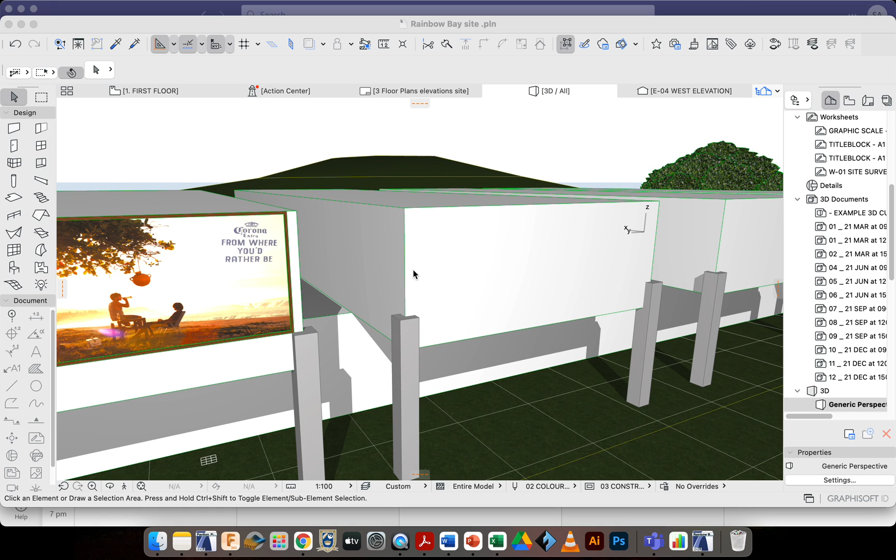In this tutorial, I'm going to take you through how you can put a picture onto a wall, and then how you can edit the image on that picture frame to be more in line with whatever theme you're trying to do.

This file here is of the surf club down at Coolangatta. We're going to show you how we're going to put a Quiksilver logo or something into a picture onto this wall here.

The first step is to go grab some images that you think might be suitable to put onto pictures for that particular theme or whatever theme you're working on. So what I did, I went to the internet and then I just made a folder, inside my building construction drafting folder.

I called it images for posters, and you can see I've added a couple of images from the net, sorts of things you might see on the walls of a surf lifesaving club down at Rainbow Bay. So that's step one, create those files into a folder and remember where that is.

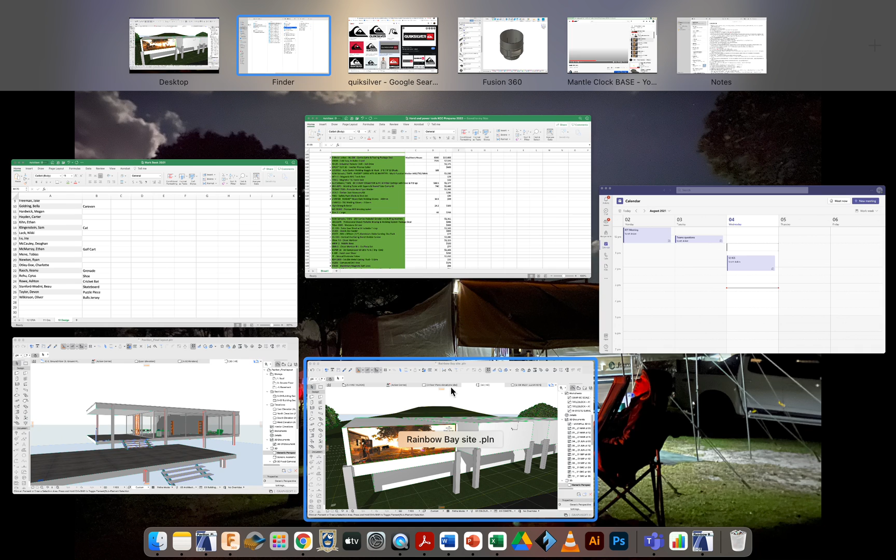The second thing is to go to Archicad and actually put a picture frame onto this wall, then edit the picture frame so it's as big as you want it to be. The third step is to change the image to the one you want on it.

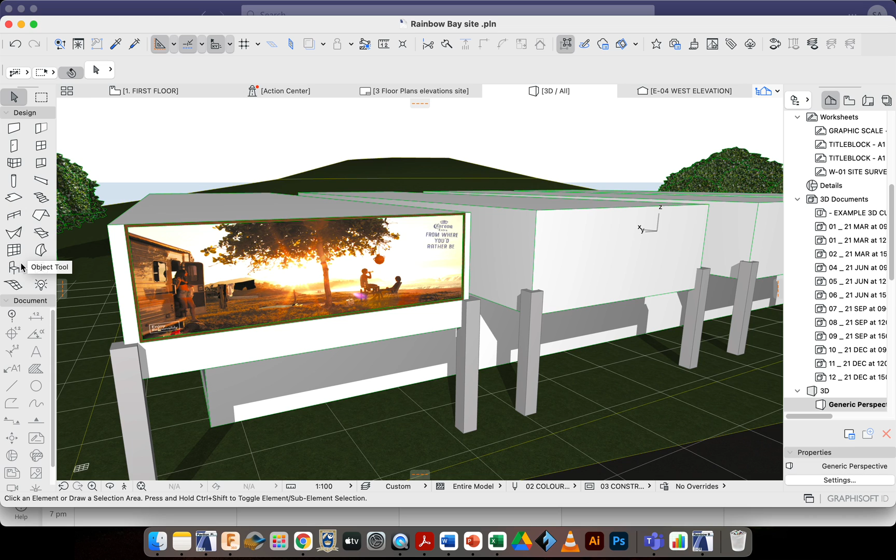Let's go have a look at the picture frame. The best way to do that is to go to the object toolbox, open it, and the easiest way to find the picture is to simply type 'picture' in the search bar. Picture 23 should then appear. Yours might look slightly different to mine, since I've edited mine a little beforehand.

So what I might try to show you is a couple of ways of manipulating this preview before you get it into the file.

First of all, rather than a picture without a frame, I'm going to choose one with a simple frame. The reason for that is sometimes it's confusing as to what's the front and what's the back of the picture frame.

If I choose simple frame, you can see there's a frame thickness, and if it's flush at the back, that means that's the back of it. If you've got this little step down in the frame, that means that's the front of the frame.

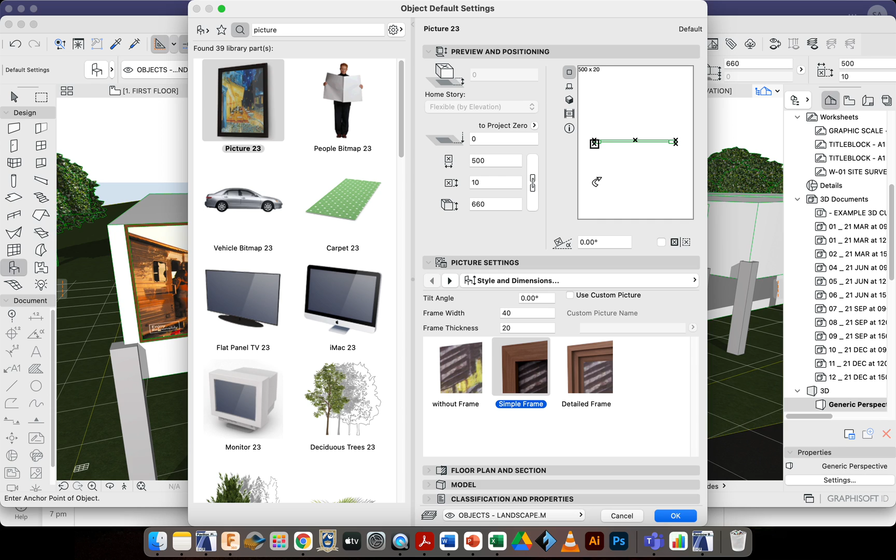So I've got that, then go to 2D on my first floor, and I'm going to put the picture on this face here. I want to orientate this picture so it's in the correct position before I insert it. I could rotate it later on, but it's easier if you get it in the right spot first.

So, simple frame, and then I'm going to use this rotation tool, and you can see now the back is on the right hand side and the front is on the left hand side. I'll click OK.

Before I click OK, notice the insertion is set to the first floor, so depending on which floor you want to put it onto, you choose that here. These are the size of the actual picture frame itself - at the moment it's 500 by 660, and it looks like it's 10 millimeters in thickness.

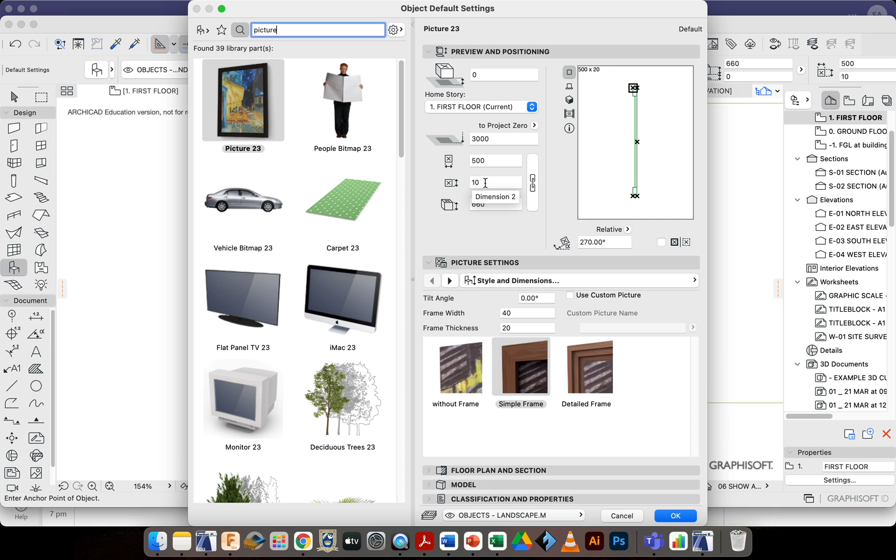Just click OK, then come to a point somewhere on this wall and click once, then zoom in. You'll see what's happened here is that my insertion point was in the top left corner, which means the picture frame is now inside the wall.

If I go 3D, you'll see it should be - you can see it there. It's actually stuck inside the wall, which is what we don't want.

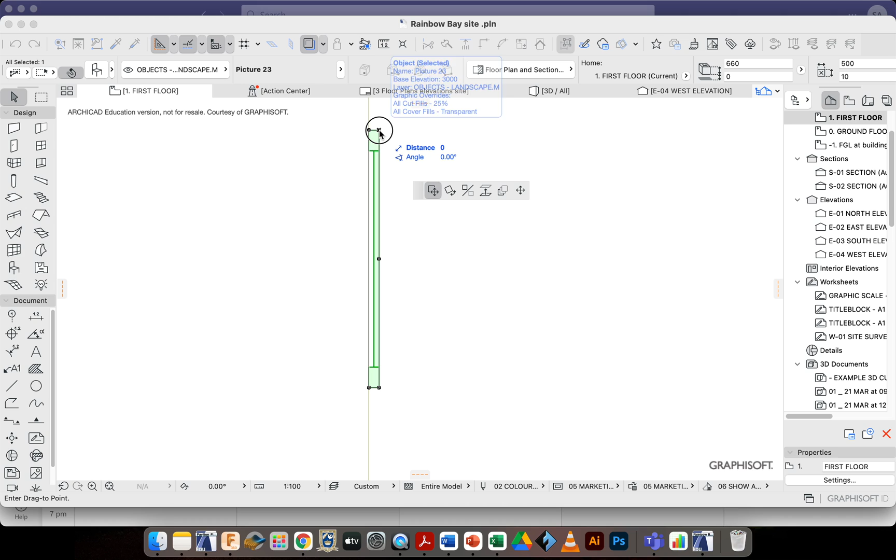So back to 2D and select the frame. Click and hold on this corner here, make sure you're in the drag icon, and simply drag it across to make it on the outside. Check in 3D - there it is there.

Now we're going to stretch this thing in a horizontal and vertical distance to make it take up most of that wall. Rather than guessing, let's use the measure tool.

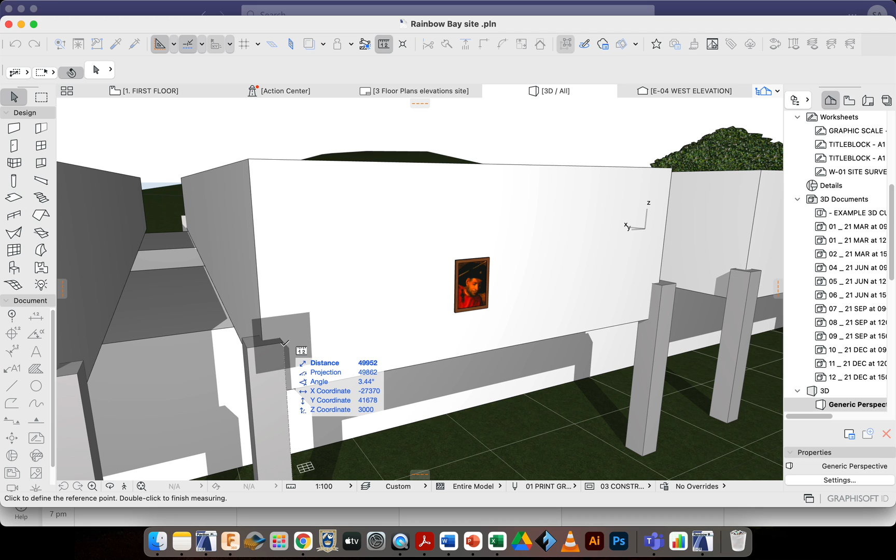I'm going to click in between these posts - one there, and two, so that's 5,800. Let's go 5 meters in length. What have we got in height there? About 1,800 high. So let's go 5 meters by 1,600, that'll do.

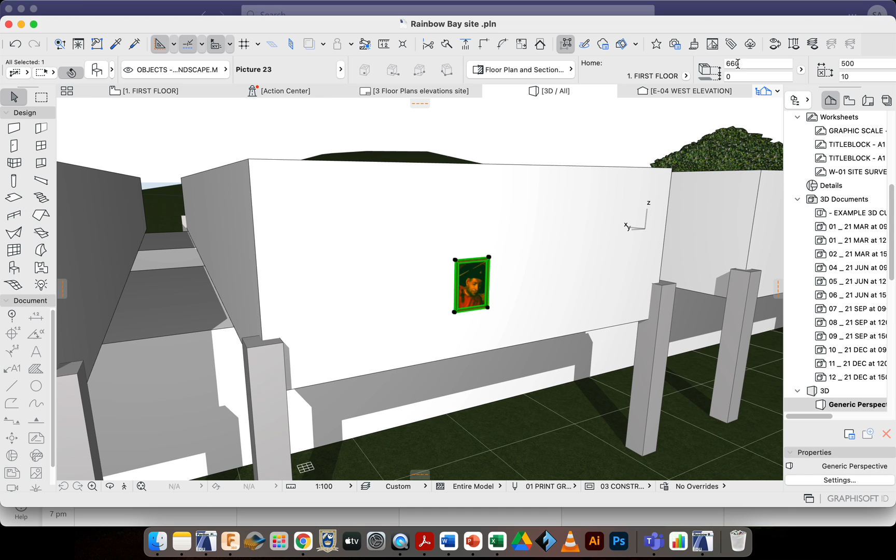Escape to get out of measure. Now I'm going to select the picture, and you can see here I can go into its settings like so and change the sizes here, or I can see that in my info box and change the sizes there as well. So let's use the info box settings.

Let's use its length, we said 5 meters, that's 5,000 millimeters. Its height was 1800, that was a total height, so let's go, I don't know, 1600. And I'll leave that at 10. At the moment I'm going to leave this distance of 3 meters down to the project zero just to see what happens. Let's click OK.

All right, that's not too bad, but obviously this position here needs to change, we need to move that up. Now I've had limited success trying to do this, maneuvering these around in 3D.

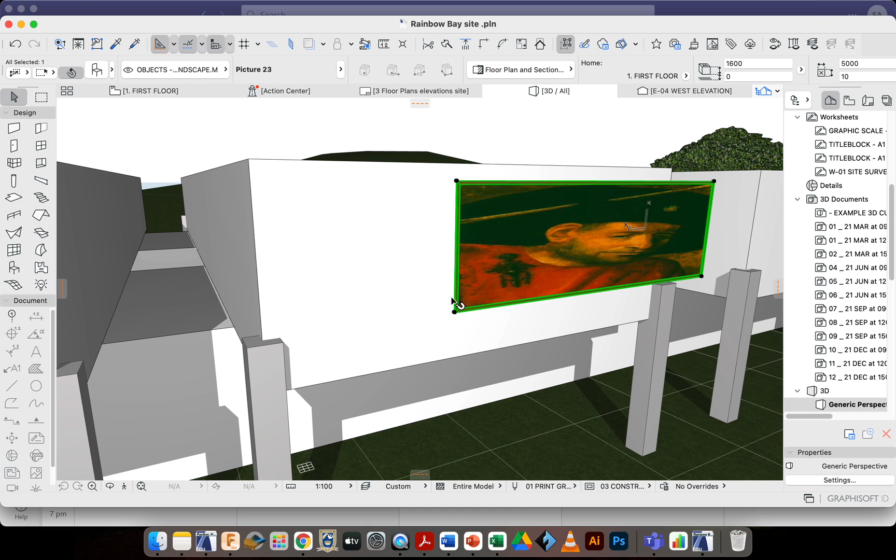I'd suggest you go back to 2D, zoom out, and you can see here I've got to move that picture frame up to there. So I'm going to zoom in on this corner, click and hold that, make sure I'm in the drag tool, which was that one there. Zoom out, and I'm going to place that right up in that corner there.

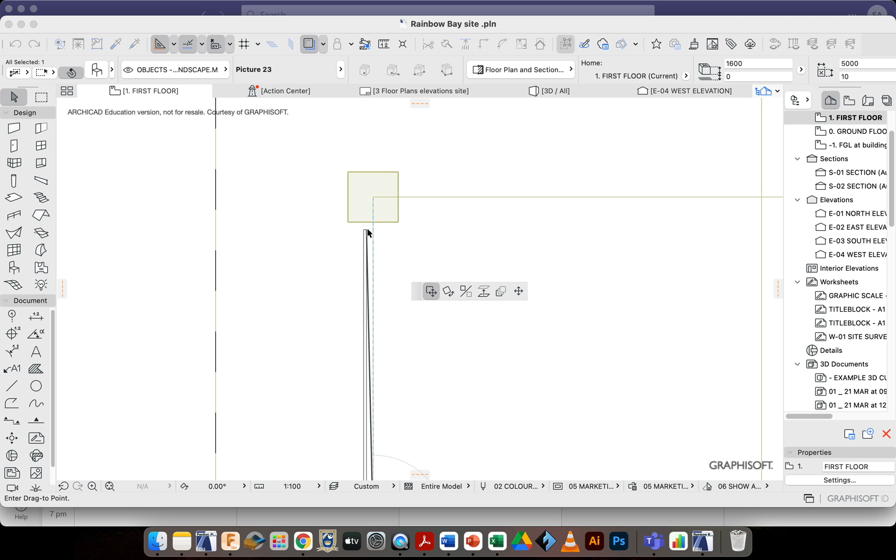Let's check the other end. Oh okay, there's a fair bit of distance there, so actually I might move that down a little bit, try to get it even. That'll do, just make sure it's sitting on the outside of the wall, which it is. Okay, that's good, let's go to 3D and have a look at that.

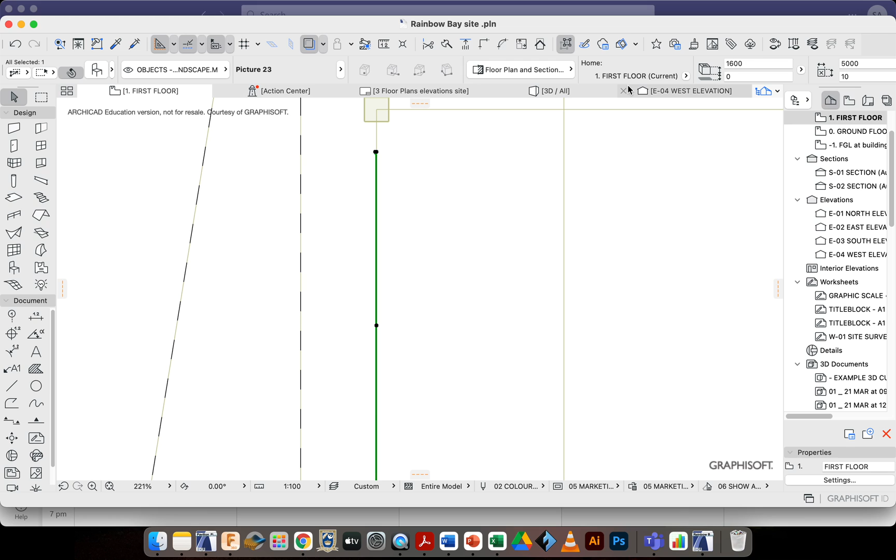And that'll do me for now. You could muck around getting that to whatever size you want it to be.

Now at this point you might say, well, I don't want this to look like a picture frame, I actually want it to look more like a billboard. So what you could do now is, rather than having it set to picture frame, simple frame, you could probably turn that frame off, or you could even maybe just make these values zero, I suppose. I might try doing that.

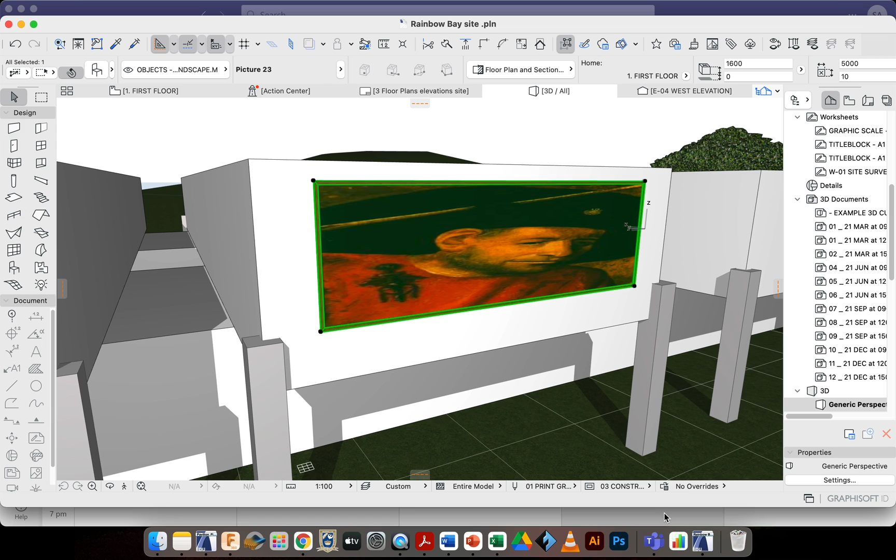That should work, let's have a look, click OK. Yeah cool, so zero and zero.

All right, so the last thing to do is just edit this image and make it something that we want it to be. Open the object, and you can see this little tab says Use Custom Picture. Click on Use Custom Picture, and then this box, Custom Picture Name, appears. Click on the arrow beside it, and what it will do is directly open up the folder that you had with any of your JPEGs, that sort of stuff in it. So I can then select any of these pictures to appear onto that picture frame.

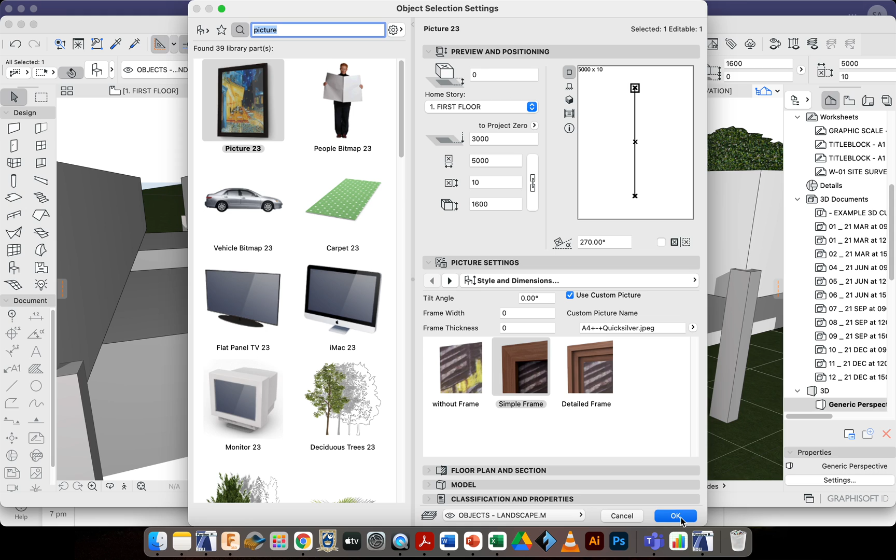If these files don't appear automatically by clicking on that arrow there, what you have to do is go back to Finder and copy that name exactly, literally copy it and paste it into this box here. But it should work like this. So let's put in the Quicksilver JPEG and then click OK, and there it is.

Now what's maybe a little bit misleading here is that JPEG actually had a big white border around it, so in actual fact the picture has taken up the entire frame that I had there.

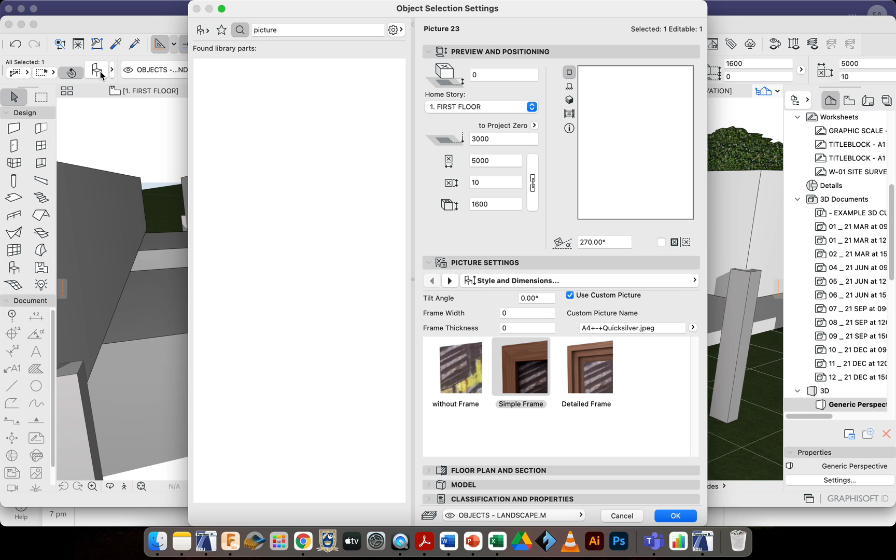As an example of another one, if I go and let's go Surf Lifesaving, let's see what this one here is. So there you go. There you can see that the picture basically tries to fit itself in as big as it can into that frame.

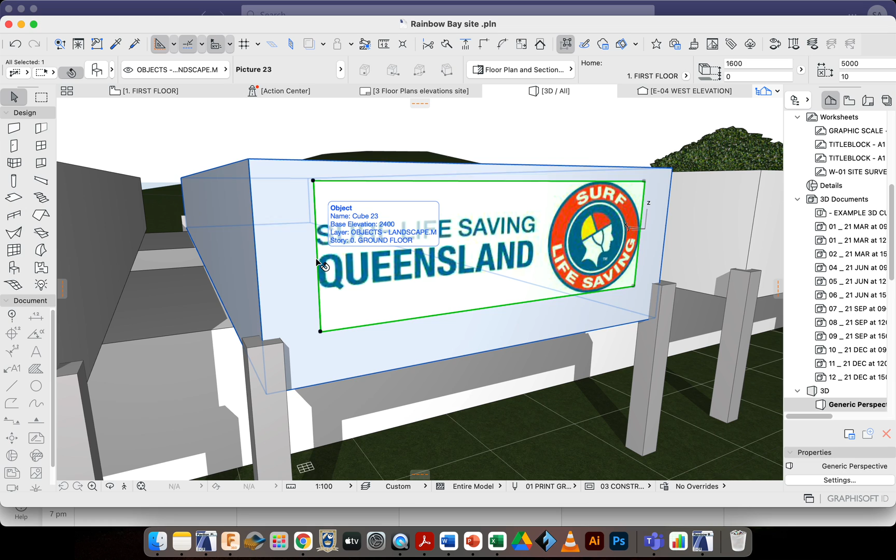So sometimes you've got to manipulate the image a little bit before you bring it in, or you could manipulate this frame here to make it longer, depending on whether you want to stretch or shorten the actual image. Okay, so that's not looking too bad.

Let's just see what that looks like in a render document, creative imaging and PhotoRendering settings. Let's turn on our quickest way, outdoor daylight fast, and I'm just going to turn the background off so that there's nothing going to take up any time. Click on the little preview box, with these new M1 chips it happens pretty quick. Yeah, and you can see that's looking fairly realistic and fairly good.

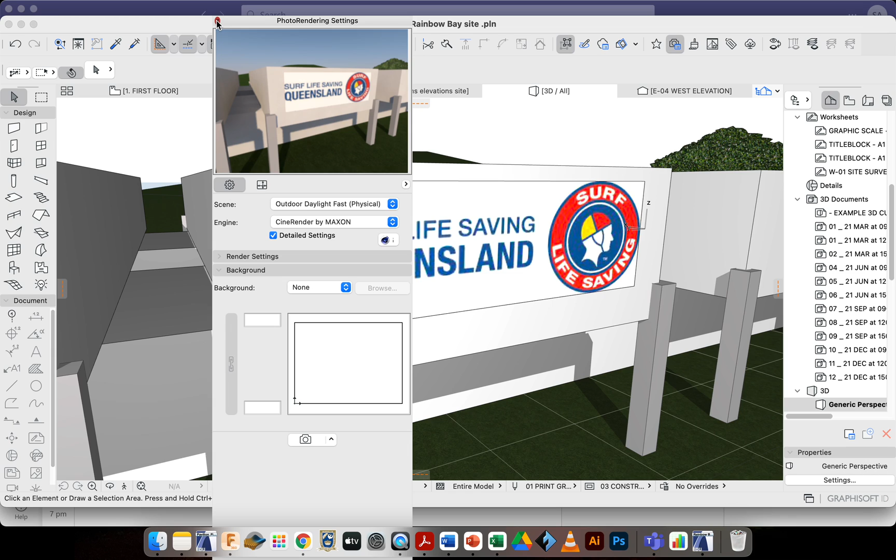Okay, that's the basics. Hopefully that's going to help you make your designs look a whole lot more realistic, and then you'll be able to impress the clients.